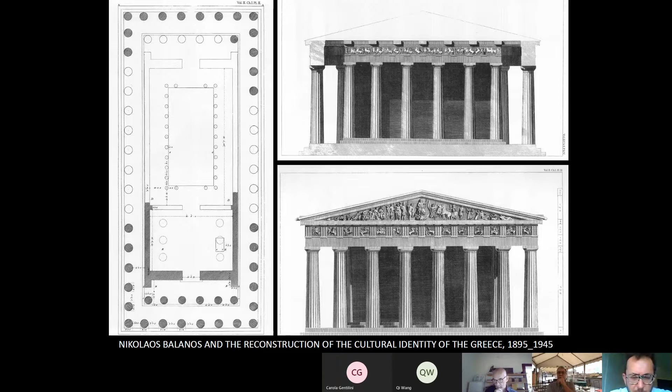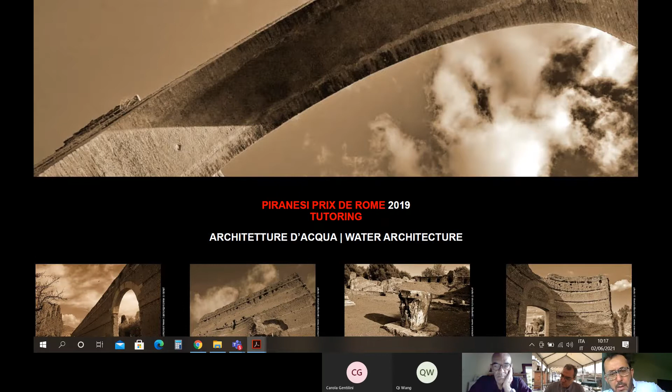I can start showing you the project sites and the issues of the Piranesi Prix de Rome. In the last years, we decided to deal with water architecture, so pavilions and interventions that have to do with water.

This is because the Tiburtine territory is very rich since ancient times with a series of villas that belonged to the most influential and high-profile Romans, who at the beginning settled in those places all around Tivoli, because of the landscape and also because of the presence of water.

And Villa Adriana, the place where we are going to design, is one of them. Obviously, Villa Adriana is the biggest, the largest, and the most important since it was the one belonging to the emperor, but lots of other settlements can be found all around, having on a smaller scale the same peculiarities.

All these villas, including the imperial ones, owe their strategic location to the presence of the Aniene River and, mostly, the four aqueducts that develop from it into a tunnel toward Rome.

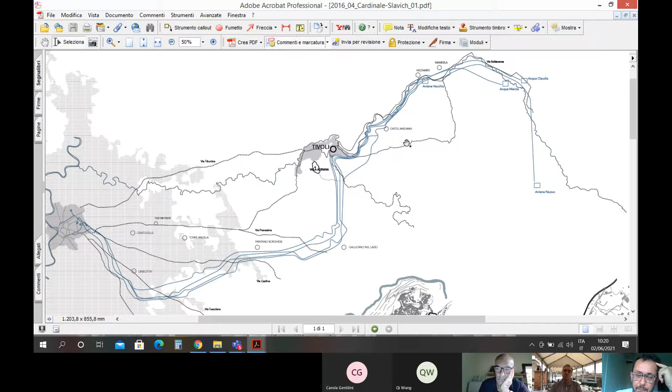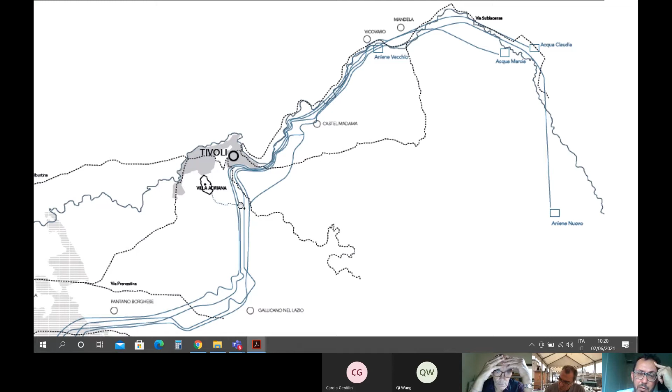southwestern side of Tivoli. The 4 aqueducts are Acqua Marcia, Acqua Claudia, Aniene Nuovo, and Aniene Vecchio. This is a closer look of the same image, and you can easily appreciate and understand how easy it was

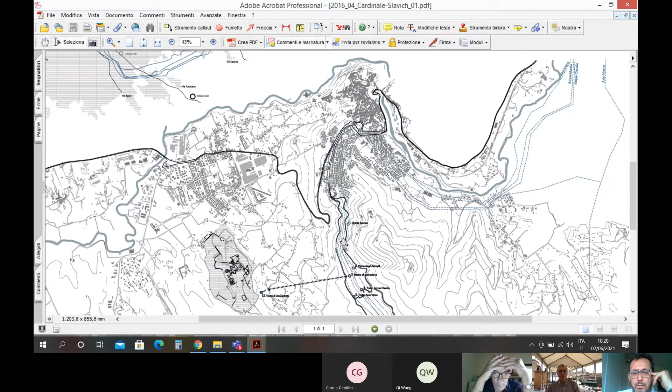to bring water from those 4 aqueducts to Villa Adriana. This is another map enlarging the view from before, showing the paths of the different aqueducts and the connection to Villa Adriana.

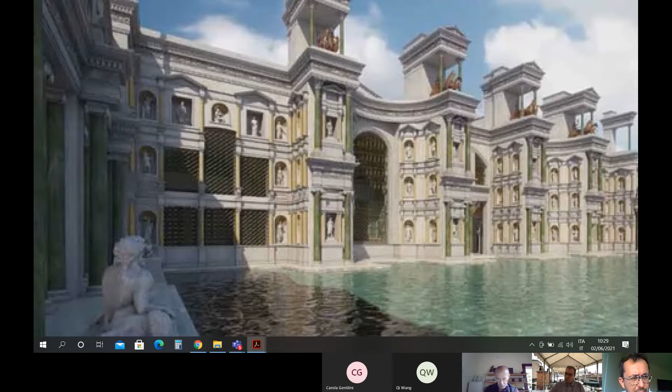But what does that mean to you, why do we want you to design a water pavilion or water architecture? First of all, because still learning from the classical age, we know that the places that used to present water, mostly the thermal baths in Roman culture, were the places where arts could be displayed and shown.

In fact, you can have a look at this picture, a representation of the Caracalla thermal bath, and you can clearly understand how this thermal bath, which we can consider a kind of spa of nowadays, used to present lots of statues and artistic pieces.

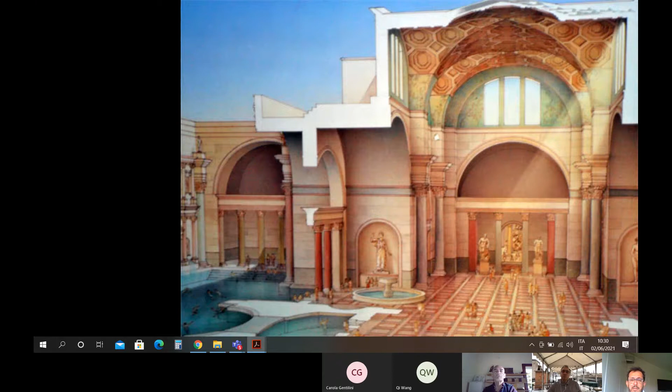Those are the thermal baths of Diocletian, for example, and even in this picture you can appreciate the presence of pieces of art all over, spread in the different rooms of the thermal baths.

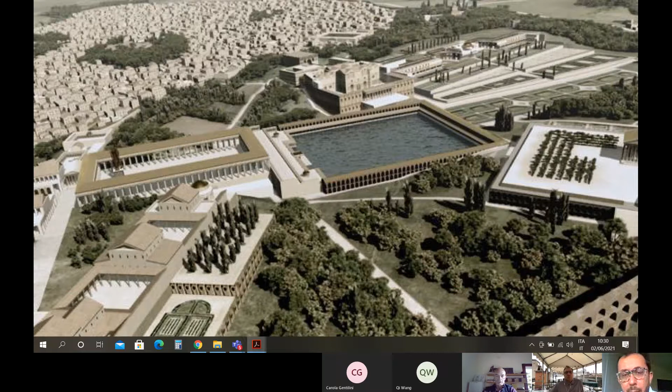This one is a reconstruction of that area currently occupied by the Colosseum. But you should know that before the Colosseum, built in the 80s after Christ, that place was occupied by a pool designed by Nero for his Domus Aurea.

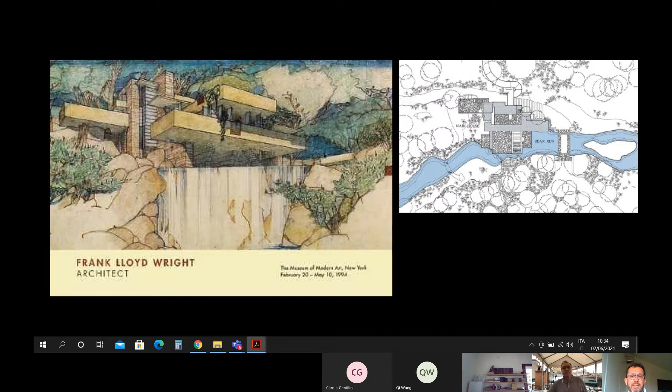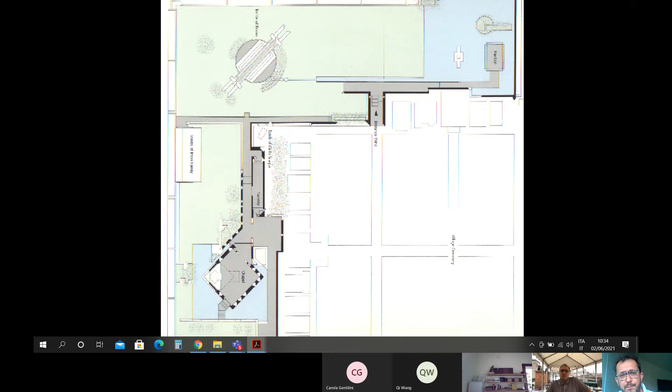I don't know if you know this architecture. This is a plan of Carlo Scarpa's Brion Cemetery. Even in this case, the presence of water in this graveyard is very important, even from a symbolic point of view, because the flowing of water has always been related to the circle of life and death. Being a graveyard, the presence of water is symbolically important, and the fact that you can have pavilions floating over the water, like this one, gives the area a particular importance and significance.

Try to guess this pavilion without the presence of water. Obviously all the design would have changed. Here you can appreciate how those small channels, like the river of life, bring water from point A to point B, like the life and death circle.

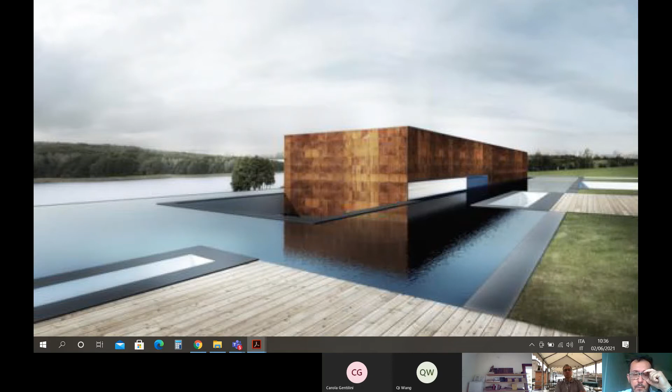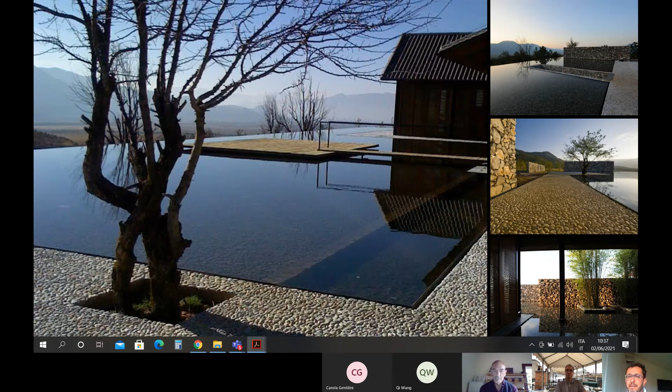Now I'm going to show you briefly lots of pavilions designed keeping in account the presence of water, using water as a building element, a building material—probably one of the most important ones, because although water is a material like others, because of its peculiarities it's very strange and important: it's fluid, it takes the shape of its container, it reflects light, and it's transparent.

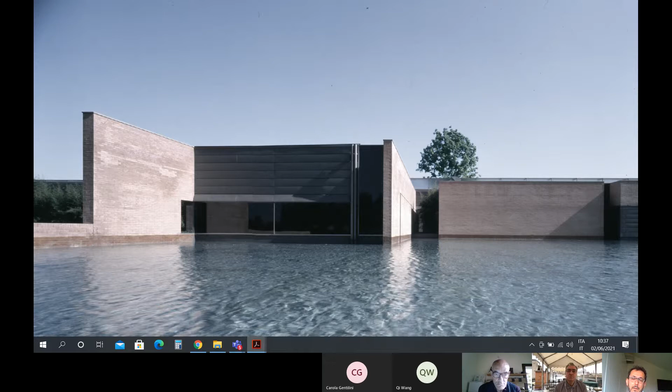Here you can even appreciate an industry that has been realized using the presence of water as a surrounding element. This is an industry in the Pianura Padana.

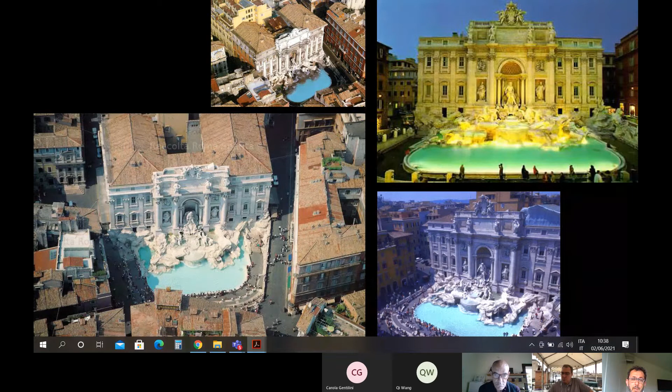And obviously there are classical examples like this one that I guess all of you know, the Fontana di Trevi, which we can consider as a fountain—that's obviously what it is, but it's also the facade of a building. So the fountain, because of the presence of water, becomes also part of the building, giving input for the architectural design.

Obviously everything should be reorganized and related to the nowadays concept and zeitgeist, the spirit of the time. But the point is that water, since ages, has always designed the surroundings and the environments.

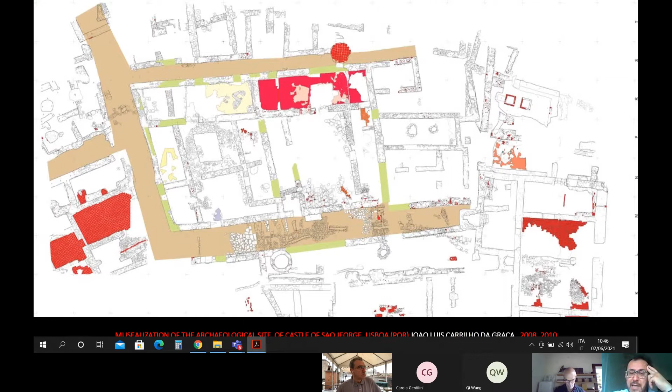And the first action that Carrilho decided to produce is the definition of a boundary, so people understand what is inside and what is outside the archaeological areas. He decided to define this boundary with this Cor-Ten wall.

This is a technical drawing overimposed on a photograph that shows you the technological element.

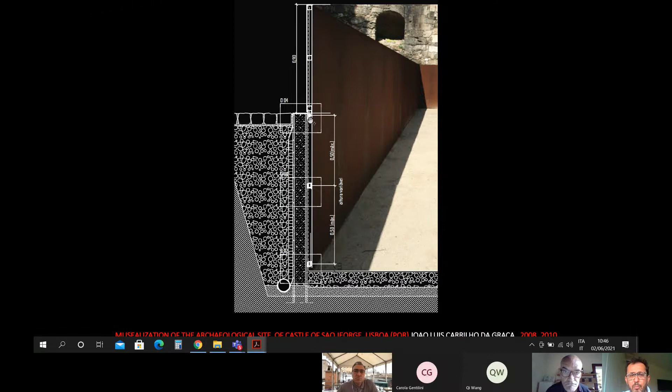What we are more interested in is the fact that João decided to define the boundaries of the area with a very sharp and neat element that gives the visitor the understanding of what is outside and what is inside. Also, the inside part of the intervention is at a lower level compared to the outside part, because when you enter an archaeological site, you usually go down, since archaeology is something on a deeper level.

Here you can see some of the intervention: this Cor-Ten wall defining the area, and also the fact that the pavement of the archaeological area has been flattened, so people can now use it and access it very easily with no problems of accessibility.

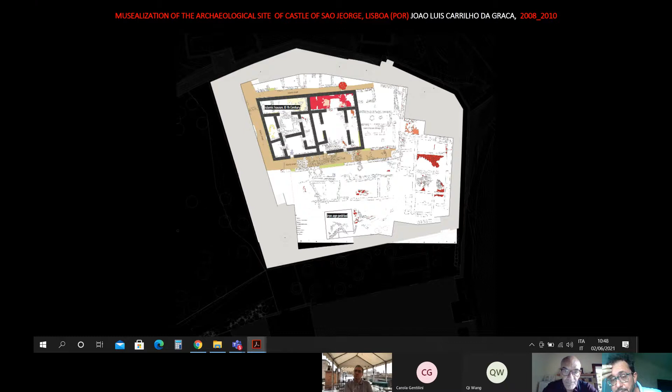This is an archaeological reconstruction of how the Domus would have appeared in its original shape. This is basically a pretty simple courtyard house, typical of the Mediterranean culture.

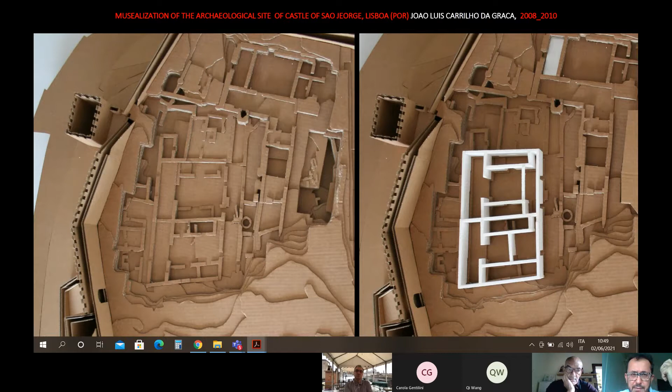And those are some of the models, the mock-ups that Carrilho da Graça used to propose and study his project. Basically, he decided, as I anticipated, to extrude the main walls to recreate the missing walls of the houses, to give people an understanding of the masses and volumes that used to occupy that area.

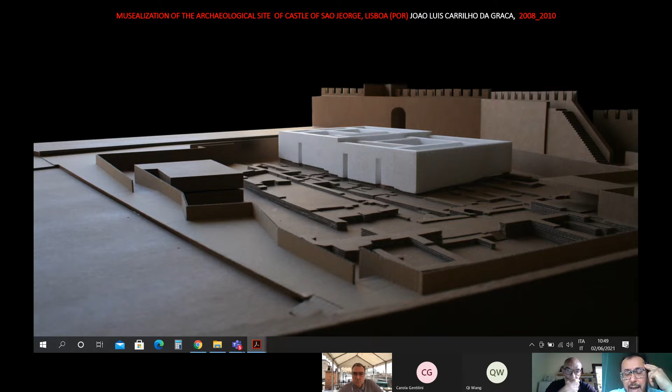This model, this maquette, represents mostly the final project from Carrilho—you can see how similar they are. It's a very abstract and clean, sharp volume, a white volume with aqua panel elements covered by plasters, standing there, giving the visitor an understanding of the dimension and volumes of the former house, but obviously not telling the visitors a real reconstruction.

This is an abstract reconstruction, just a chance to create museographical volumes that can be visited and can then host elements inside.

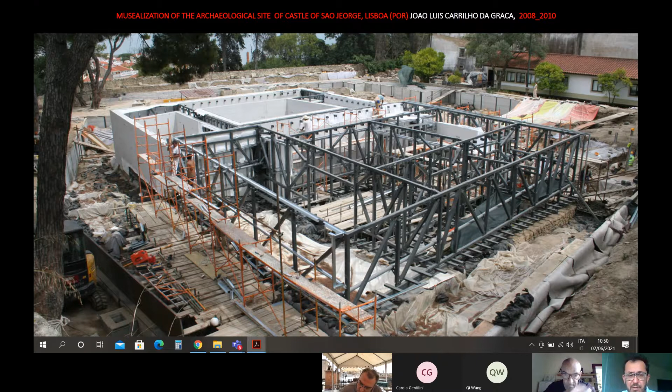This project is basically completely reversible. In fact, its structure is composed of metallic beams and pillars touching the ground only in 6 points, nothing else. So only 6 pillars touch the ground, greatly reducing the danger of damaging the archaeological remains. This metallic skeleton is covered with panels that redefine the skin of the building.

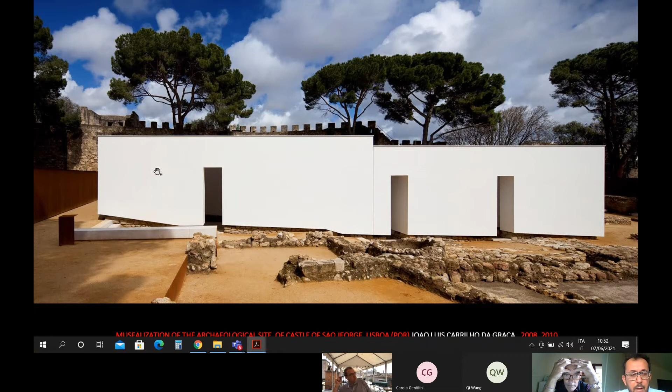I don't know who has some chicken. No, not chickens, it's my seagulls, my pet. Yeah, you are in Rome, you have seagulls? No, you got it wrong, that was Romolo, that was Romolo singing. Okay, I hope that the seagull is a good omen for us and for Piranesi for the next months.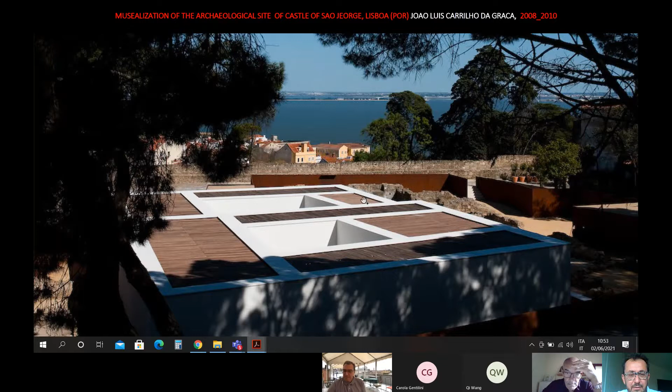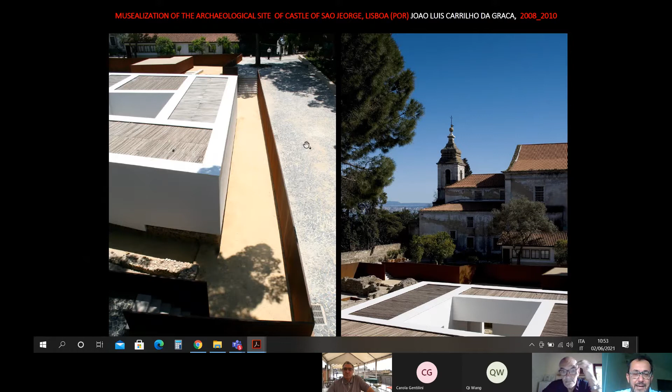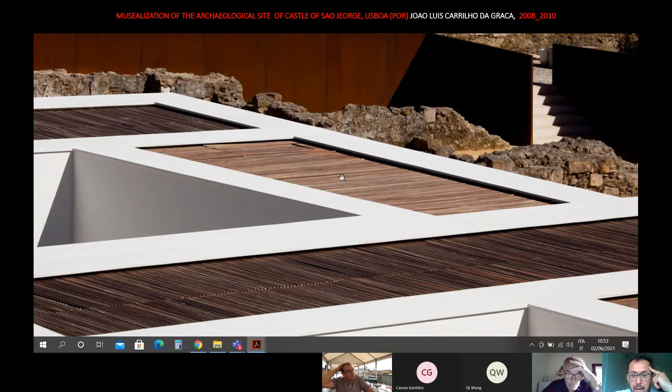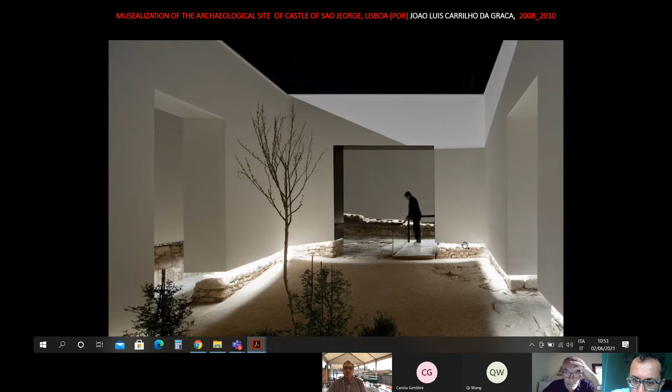This is the final effect. Probably we can have lots of seagulls even in Lisbon, I guess. And this is the final effect of the reconstruction of the Islamic house that is accessible and visitable from visitors. This is the rooftop, designed in a way the light can enter, filtered by those wooden elements, not continuous, and can be clearly appreciated even from the outside level that is higher, as I told you. So you can have a look at the roof of the new intervention that became a kind of fifth facade of the building. Here is a closer look at the roof, and this is the interior views of the domus. This is the courtyard, obviously. This is the courtyard during night, to emphasize even this floating effect of the new intervention.

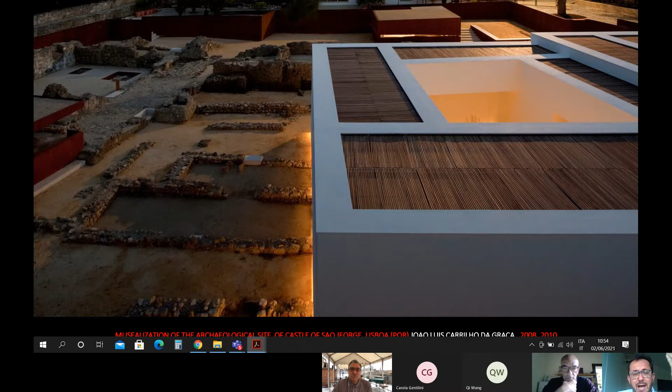Carrilho decided to put lights underneath or inside his intervention to emphasize the relationship between new and old. Obviously, some pathways that help the visitors appreciate the archaeology better. And this is a view of the area during the dawn, and the color of the light becomes warmer and more orange, and the building looks like it's floating even more in the surrounding. It's a very simple somehow intervention, but on the other hand, a very paradigmatic intervention as well.

And it is obviously contemporary architecture, because what I want to make clear, because maybe I could have been misunderstood, is that when you come to the Prix Piranesi, you will learn from classical architecture, but you will design contemporary architecture - if there's a difference between the two, actually, because this is something that can be debatable.

The second intervention is the one from Giorgio Grassi about the restoration and rehabilitation of the Roman theater in Sagunto. This is a very, very famous and debated intervention, because the reconstruction of the Roman theater of Sagunto is the most important architectural experience for archaeology in Europe since the anastylosis of Balanos in Athens and Munoz in Rome. Balanos in Athens is the intervention I already showed you before during my presentation. We can say that there is a before and an after Sagunto.

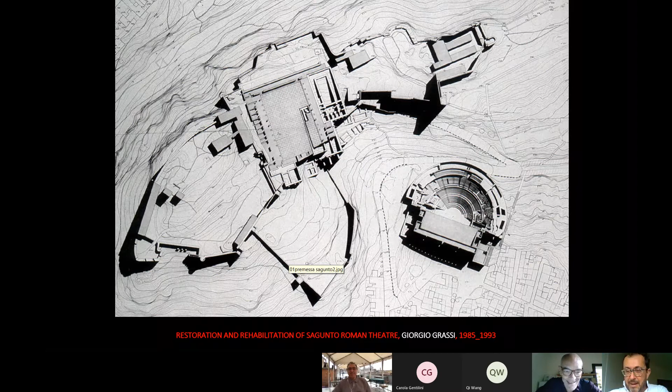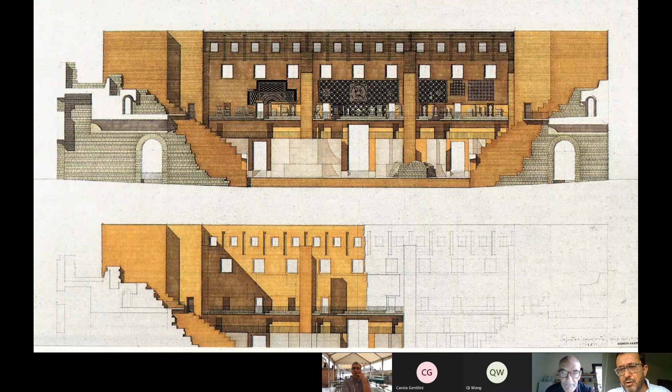The idea is to extrude exactly the volume that was there before. Those are some of the drawings used by Giorgio Grassi to define the intervention, and actually the only ones we can have. And this is the model.

I said that the intervention is massive and bulky somehow, but the point is that it's exactly the dimension and the masses that we used to have formerly.

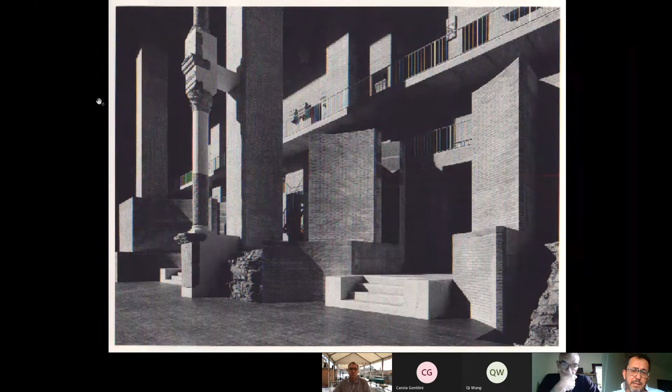Those are original photographs during the opening ceremony. And these are pictures taken by us during some of our visits to the area.

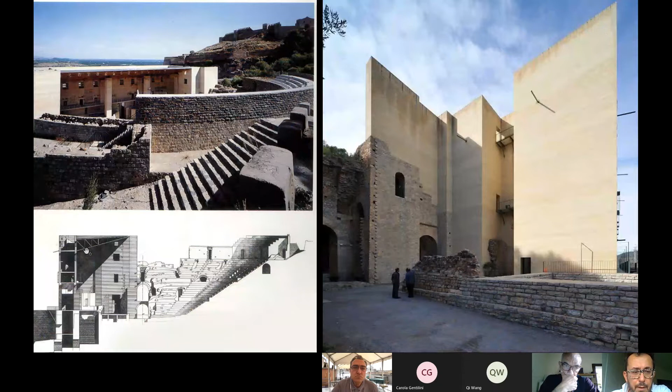You can see in this drawing how the philological reconstruction is pretty precise. The scenery kept exactly the same height as the summa cavea area, and the internal space is a very defined interior space, clear and understandable, also because of the hearing needs that you have in a theater.

In the right image, you can appreciate the limit defined by the archaeology and the new intervention. So you still keep a clear recognizability between the two, but at the same time there's no solution of continuity in the shape and form of the intervention, because, as I told you more than once, the need was to reproduce a Roman theater.

This is the reconstruction of the seats for the visitors. Even in this case, he decided not to reuse the entire seating area, just to show the relationship between old and new.

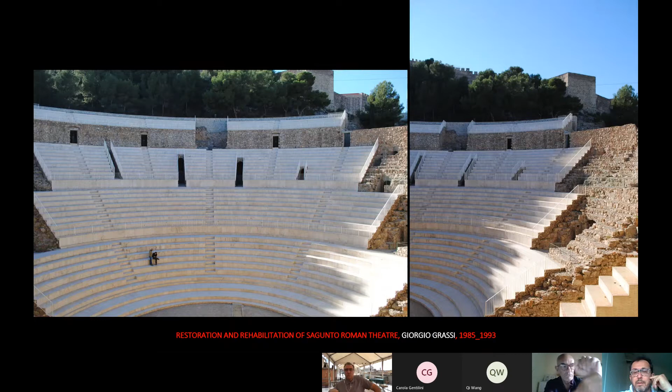And those are some of the views that you can have visiting the area. Is it important that people go there to visit the theater despite no representations being on? Because basically it's a museum of itself and of the process of the musealization.

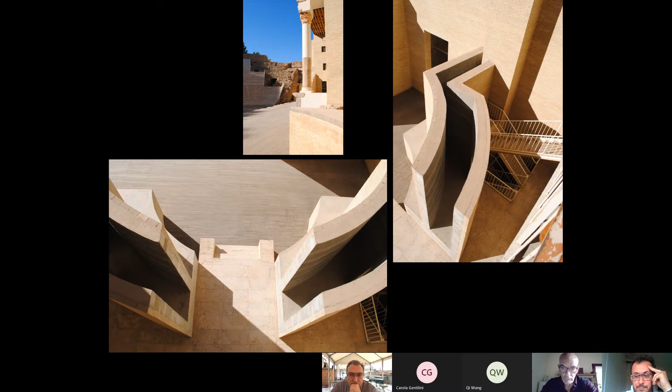Being honest, we can clearly say that this project is not removable. And this is one of the reasons, probably the main reason, why it has been so debated, so fought over. In fact, there's still a party over there that is against this reconstruction, and they want to demolish it.

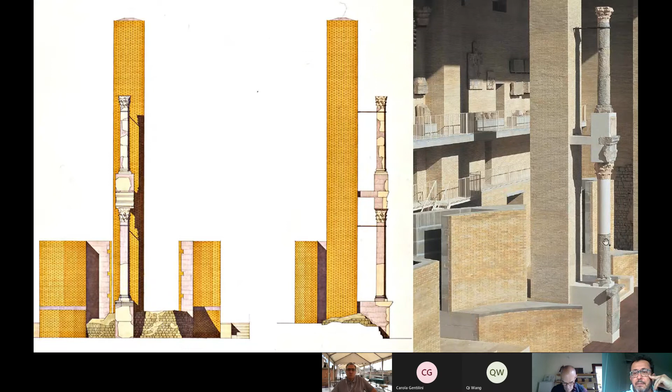Here you can see the relationship between the ruin and the architecture. Still some drawings showing you the anastylosis of the two orders and the photographs showing the realization. Here it is.

Those two approaches, the one from Carrilho da Graça and this one from Giorgio Grassi, are the main approaches you can have to insist on the ruins when you are going to attend the Premio Piranesi. Obviously you won't be left alone during the Piranesi; you will be followed by tutors that will help you understand and take your decisions. But basically, those are the two main branches you can choose among for realizing your project.

Sorry if I'm going that fast and not giving pauses, but I don't want to bother you too much, and I want to close everything in half an hour more.

So now I'm entering some technical dispositions of how we draw during the Piranesi Award, what we ask of you. The idea is not to have only the best representation possible, but to be more attainable as possible. We have an academic tradition during the Piranesi Prize, addressed to give your drawings, your expressive possibilities, the chance of being as realistic as possible. That doesn't mean you produce photorealistic renders, but it means what you draw and represent is readable, understandable, and measurable.

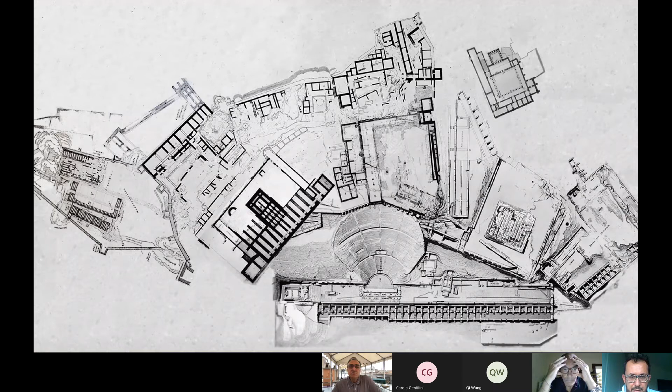Those are some examples of former drawings by our masters that we took our ideas from. This is the representation of the Acropolis of Pergamo. You can see everything is black and white and clear, measurable, and starts from a real survey. This is the plan of the same area, but this is just a survey of the archaeology nowadays. This is a hypothetical reconstruction.

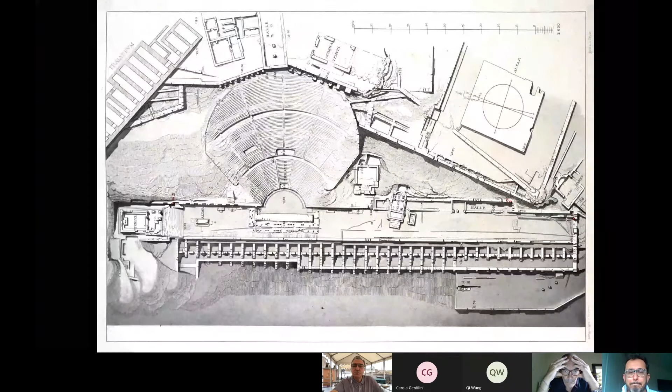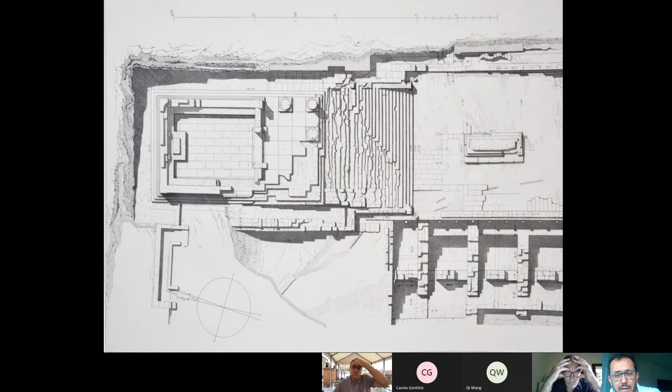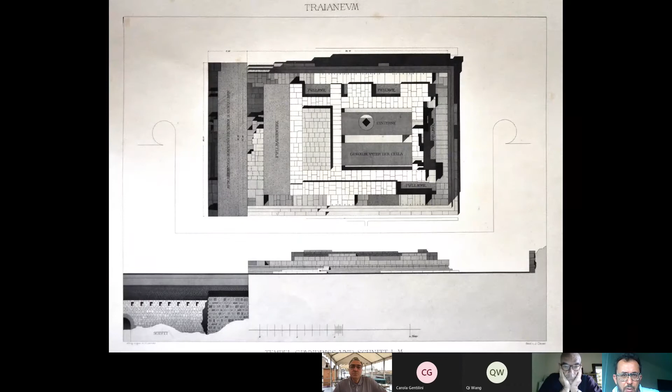Another amazing drawing. Now I'm going to show you an example of how a technical design could also be artistic. All of those drawings were designed by hand, but you can achieve exactly the same results using AutoCAD or any vectorial program. Look at this, a great reconstruction of the Pergamon altar, plan of the ruins, and so on. I'm not going to use too much time for that.

Obviously, if you can sketch this way, your sketches are more than welcome.

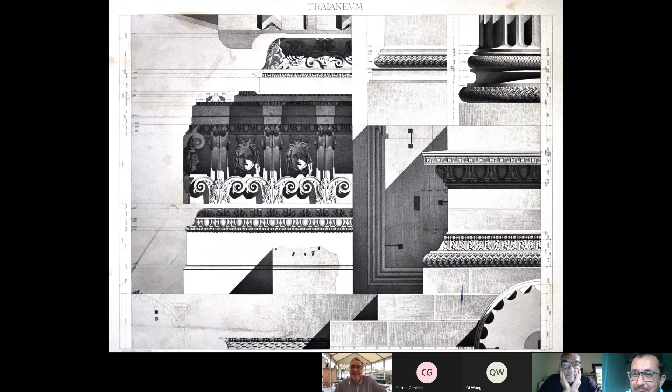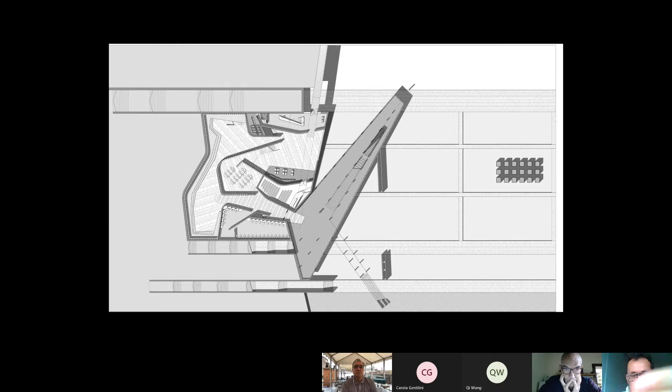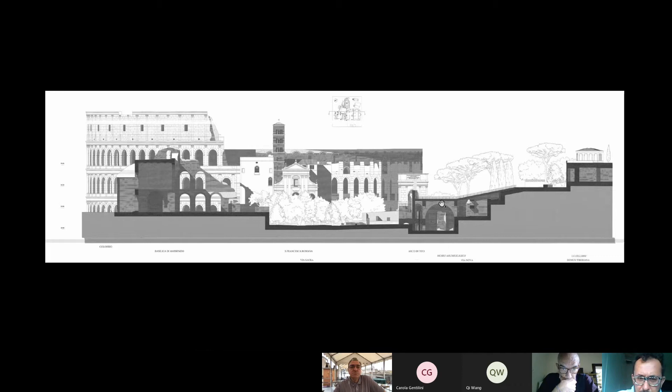This is some of the final thesis production we had and presented. As you can appreciate, this is contemporary architecture represented just using vectorial elements, without colors, without texturing. But the idea behind this architecture is absolutely clear, not misunderstandable. You can't be misguided by those. This is probably the Colosseum and the rest of the Via Sacra, in Santa Francesca Romana.

Those are some drawings. This one is Sagunto again, and this one is the Museum Island in Berlin - the Pergamon Museum, the Bode Museum, Alte Nationalgalerie, Neues Museum, and Altes Museum.

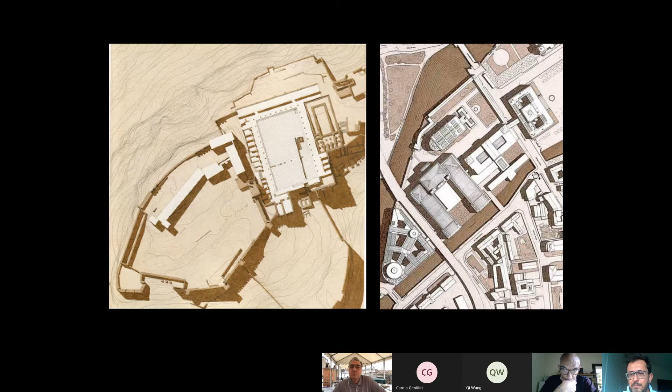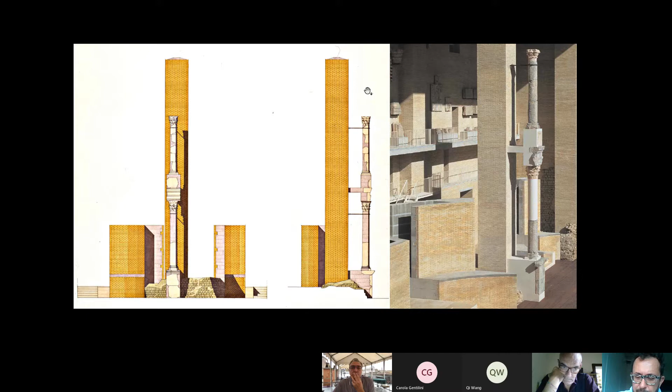Those are some drawings that I already showed you. Here, the texturing is very simple, realized just by adding colors, but the texture is pretty clear and understandable all the same. Again, some drawings of Sagunto.

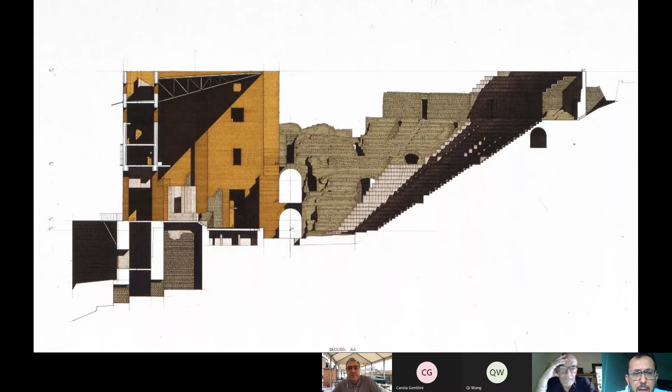Those are the kind of drawings we would like you to produce. Those are by hand, designed by Nunzio Dego, just using ink and Pantone - we used to call them Pantones or markers.

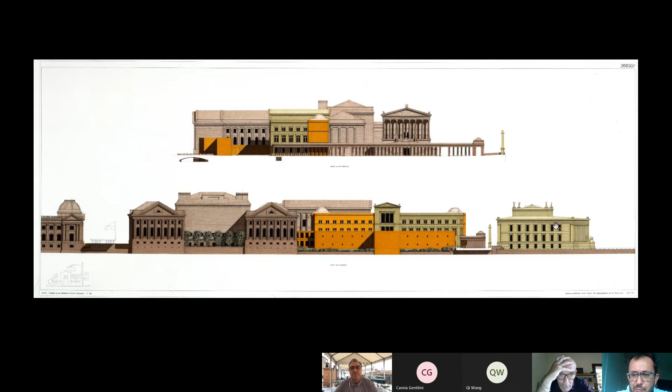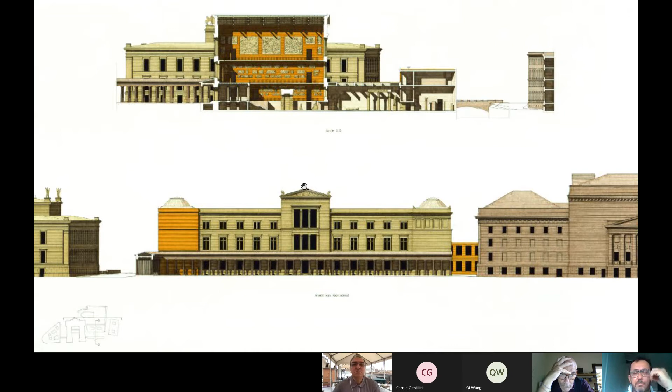Then, through the years, this is a project realized during one of the Piranesi Awards. After you produce your project in 2D, measurable dimension, you can have a photo insertion, and use Photoshop or any trick you have. But after that, your project has been analyzed and checked.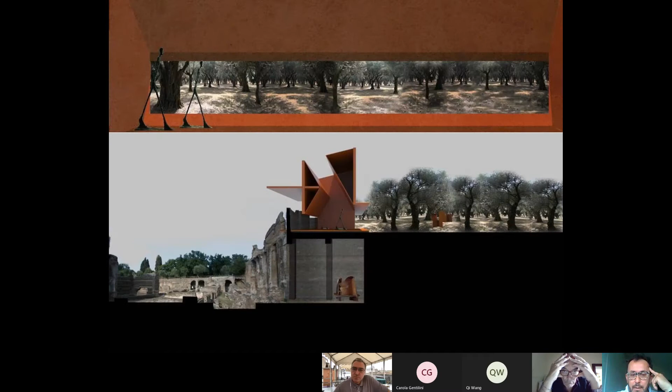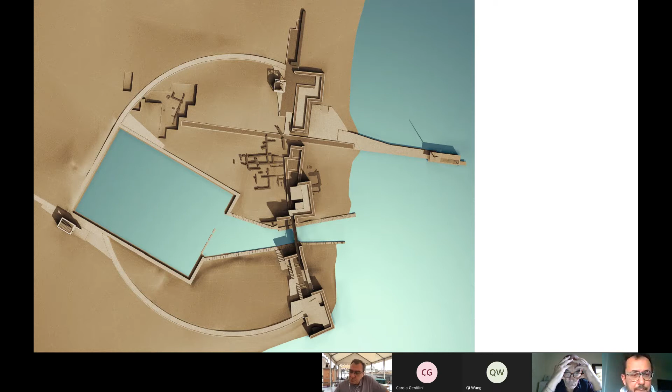Here you can see some ideas, some situations. These are projects realized on the Pretorio. And this is a project, not in Villa Adriana, but part of the project itself - we really love this representation system.

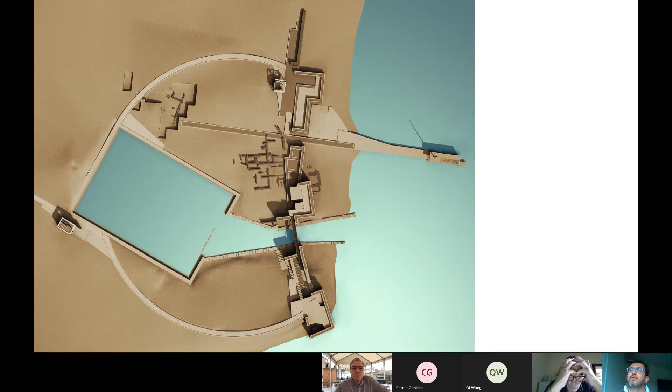You should understand that those renders are from 2004, so 17 years ago. This is in Sicily, but as you can understand, this representation is pretty similar to taking a photograph of a model, nothing more, nothing less. Here you can clearly understand the project and appreciate the difference between archaeology and new intervention. Everything is understandable, measurable. It's a model obtained with 3D.

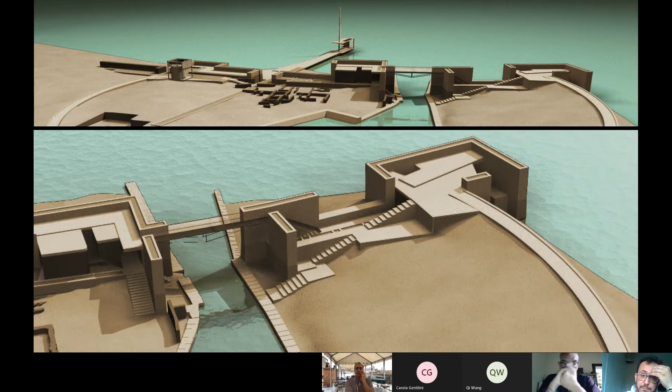Here they are. Those are renders produced by Filippo Fantini, as I told you, in 2004. Still exactly what we would like you to have.

Also, to have artistic outputs, it took more than 2 weeks. Because at the end of the day, when you attend the Premio Piranesi, you don't even have 2 weeks - you arrive, you get to know the other groups and people, you compose your groups. So for the first 2 days you don't work. Then you submit your final project 3 days before the ending, because after you submit you have the presentation, and the day after, the award ceremony. So basically at the end of the day you will have 8-9 days, one week or roughly that time, so you don't have time to refine your renders.

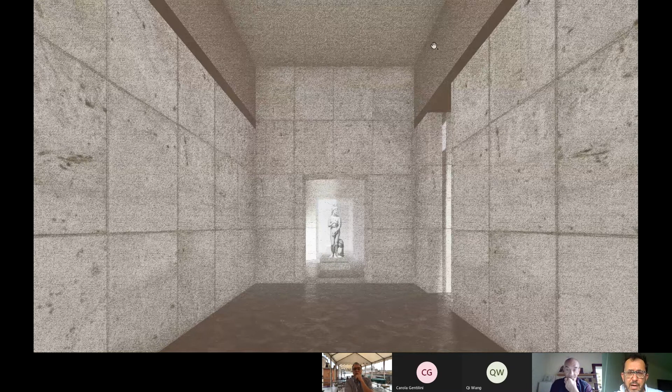That's why we also create a protocol of how to produce similar views, similar renderings, applying this protocol to some easy commands of Photoshop, of other softwares, and you can see which kind of drawings we ask the students to produce during the Premio Piranesi. Those are views produced by some of your predecessors in past editions of Premio Piranesi.

Those are the kind of projects we ask you for: pavilions, insisting on the archaeological ruins with the musealization needs, and with the presence of elements that design your architecture, possibly with the presence of water, like this one.

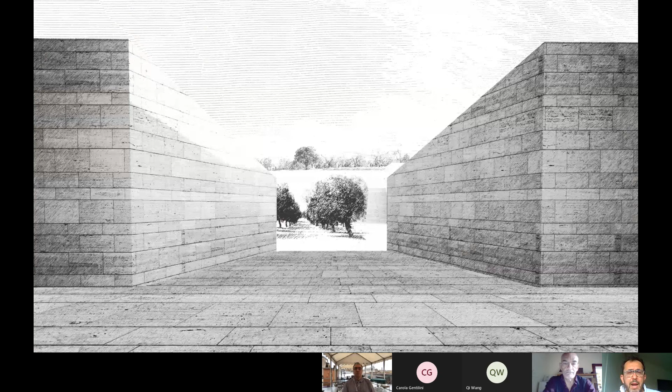Galleries and pavilions, hosting architecture, the use of light is very important, the presence of the shadows, the way that the surrounding lets the sun kiss your architectures. Here you can even appreciate the way they decided to represent the sky using an ancient engraving, probably from Piranesi itself, facing your new architecture. This is the interior of one of the pavilions designed by students like you.

Other views of the interiors. And don't worry, we're going to help you in this, and we're going to give you all the protocols needed to obtain those results.

Water pavilion, mostly. The second one is a project about the refunctionality of the buffer zone all around Villa Adriana. So it's more a landscape design, taking into account that no-one's land that is around Villa Adriana, and that is usually around all the UNESCO sites in the entire world, that are usually frozen because of UNESCO's request, but that should be redesigned and somehow rethought to avoid them turning into a no one's land. And this is the second project, a landscape one.